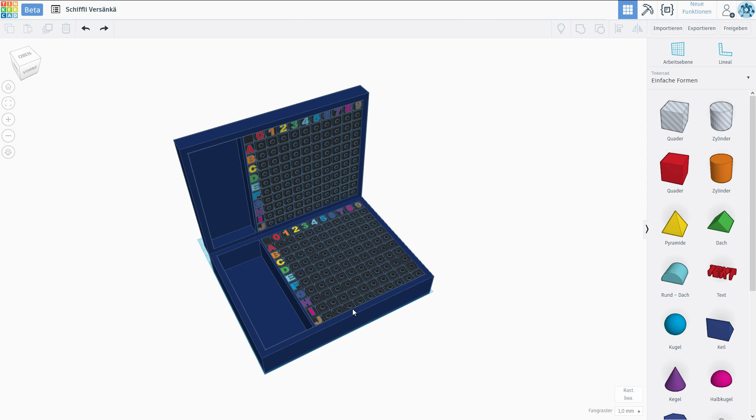I think it turned out pretty well, however there are quite a few things we still have to design. In this episode I want to focus a little bit on the functional parts, essentially creating the hinge system and possibly also a locking mechanism so you can store it away without it opening up on its own. Okay, with that out of the way, let's get right into it.

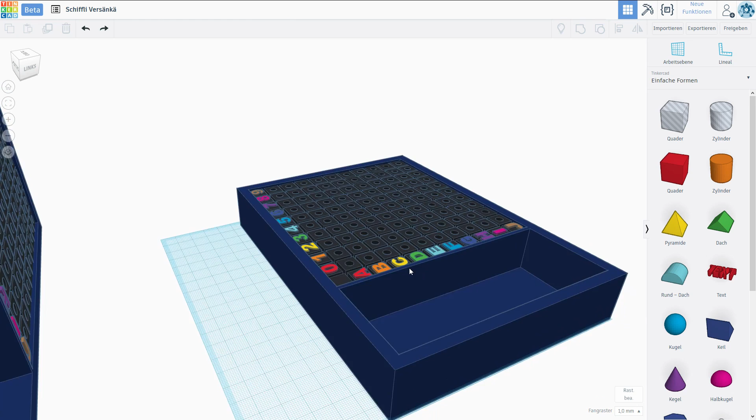First of all, I want to push this out of the way, I don't really need that right now. We are going to focus on this part right here, and I think I want to start with a normal cube. Yeah, let's use that and see what we can make of it.

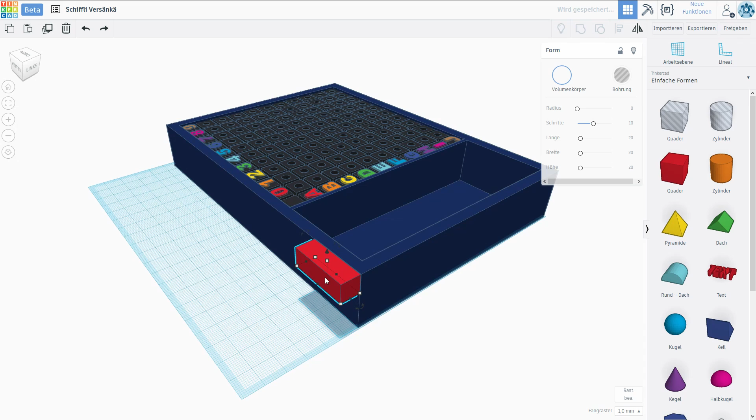I want to make this approximately 1 centimeter and then it can be approximately 30 in length. Let's bring this all the way up to the position I want it to be in, right there. And I think I want to go approximately 2 millimeters into this direction, so we have a little bit of an edge here.

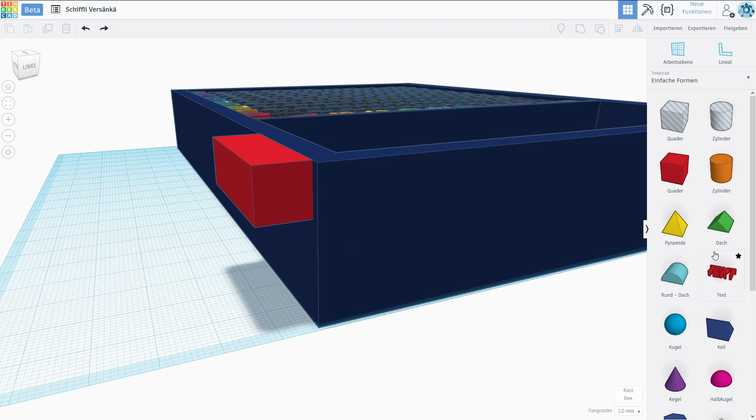Now, one thing we should always keep in mind is how we have to print it, and of course this one right here would require supports. However, I would like to print everything, or most of it at least, without supports. That means we have to keep gravity in mind, and for instance we can fix this by placing one of those guys inside of it.

So we're also going to make this 3 by 1 centimeters. There we go, and we're going to bring this over right there. Now, most printers can actually print at a 45-degree angle, so we don't necessarily need it to be this big.

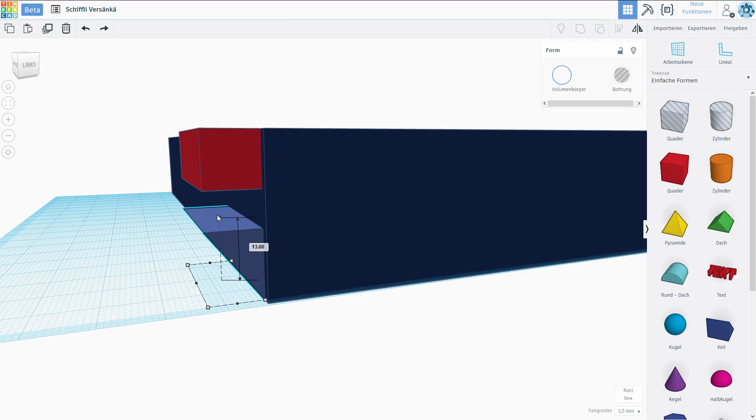Let's go ahead and do something like 15 millimeters. I'm gonna bring this back up. There we go, so that is gonna be my system, and this should be printable.

So why don't we go ahead and actually already combine these two guys? We need to do some further editing, but this way we can see a little bit better what I'm going for. The next thing I want to do is actually poke a hole into that.

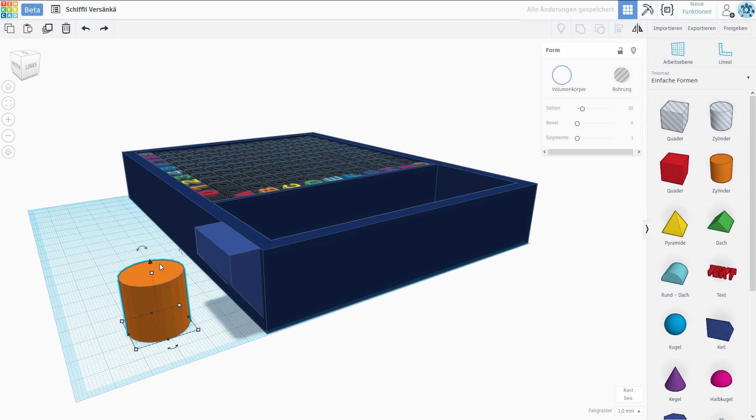So we're gonna create a cylinder and rotate this around. I'm gonna make this approximately 5 millimeters in diameter, make it a little bit longer, and bring it up to a position I'm comfortable with.

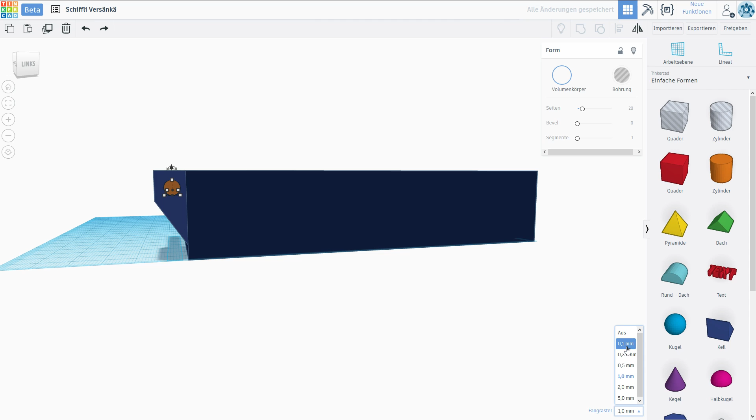This looks actually not too shabby. Maybe it's a little bit close to the right side. I need to go a little bit lower with my snapping here. Yeah, looking good, I think this is more or less centered. We're gonna go with that.

So this is going to be a hole, and therefore we want to combine these two objects and we should have our little hole for the hinge mechanism.

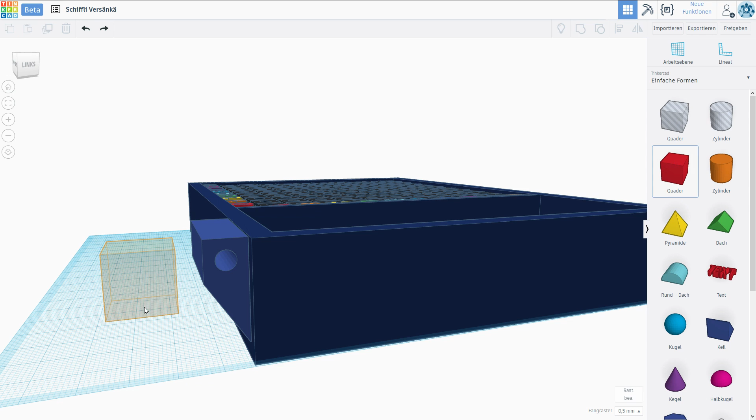Now, looking at this, we might want to do some cosmetic changes. Could we actually go with a normal cube? We're gonna rotate this 45 degrees, bring it up a little bit, and cut off a little bit of this edge. I would say we can cut off about this much and we should still be good with the stability of our item here.

Now, this is actually the first hinge I'm ever designing here. I'm just looking at a box that I have and trying to replicate it as best as possible.

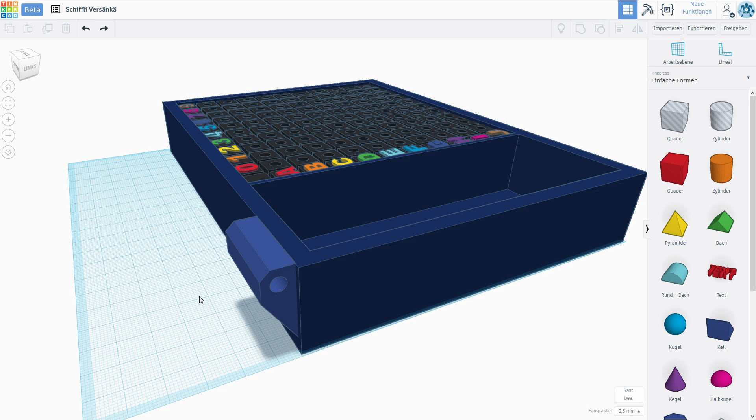And I see they have made some kind of locking mechanism on one side and not the other, so it's not symmetrical. So what I'm gonna do is copy it over at this stage, and using shift I can just drag it in one dimension. And we want to go ahead and do the same 2 millimeters right here, the distance.

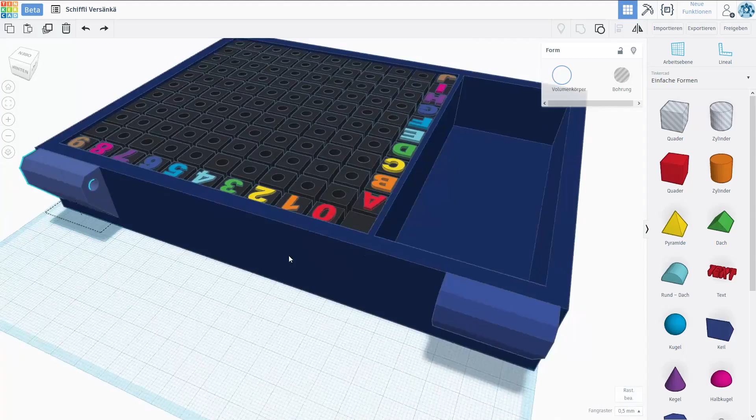And then we're gonna go back to this guy and switch up a few things right here. They actually have several shapes: one is just the stick for the entire row, and then they have a stopper shape on this side. This prevents the stick from wobbling and rotating around too much.

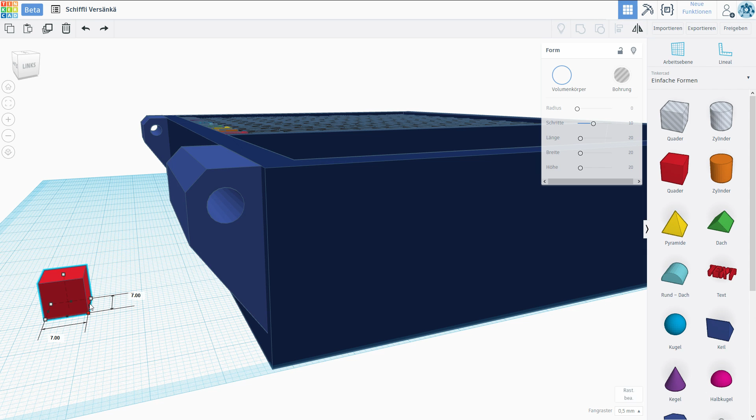So what I'm gonna do is take another cube, but make this substantially smaller. Let's go ahead and do approximately 7 or so in diameter, and I want to bring this right up here. Now I think what I'm actually gonna do is make this the same size.

We're gonna go with 7 by 7, that's the size of our hole. No, the hole is actually 5 by 5, isn't it? So that's probably what we should do, we should just poke out this section here. And how much of it should we do?

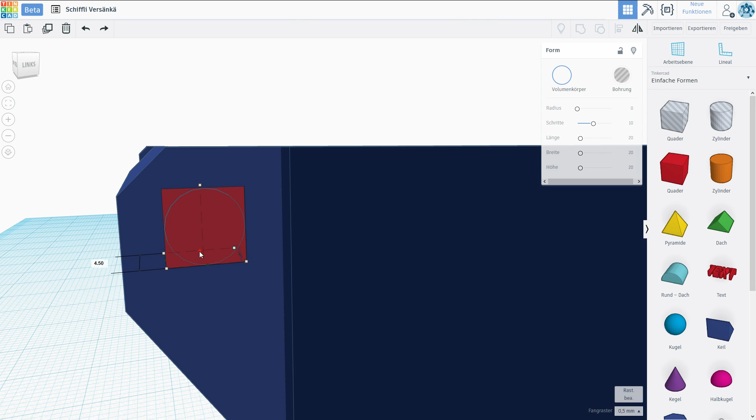Let's do approximately 3... no, we can actually do half a centimeter. No problem, we could do even more. Let's do more, we're gonna do exactly 1 centimeter.

There we go, we're gonna make this a hollow body. And then we need to combine it with this guy. Let's try to do that.

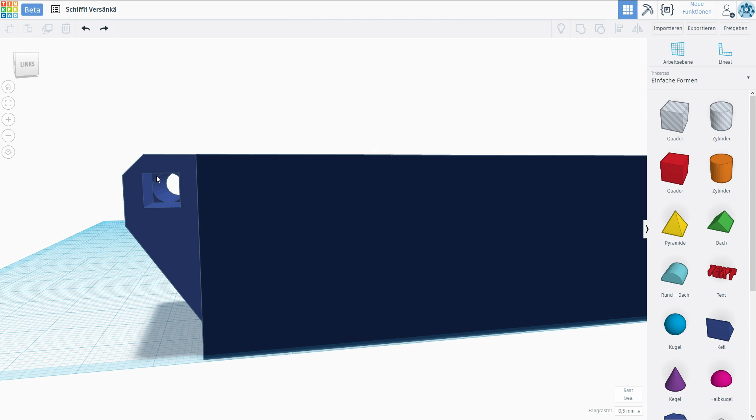Oh yeah, okay, and now we have this stopper block. So we do have the stick, but there is one of those cubes attached to the stick, so the stick itself cannot rotate or wobble around too much. To finish this off, we could even make a cap that we can attach and put right into there. But if I get the dimensions of the stick correct, then we should have no wobbliness at all.

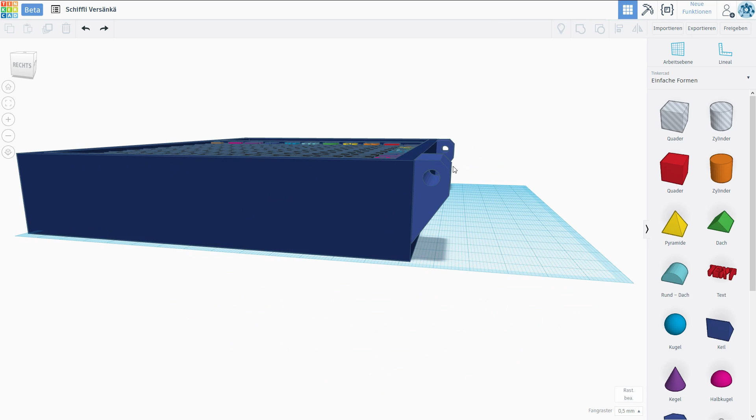So is this everything we needed to do for the bottom part? And this should also be printable, no problem whatsoever. Great, let's take care of the upper part.

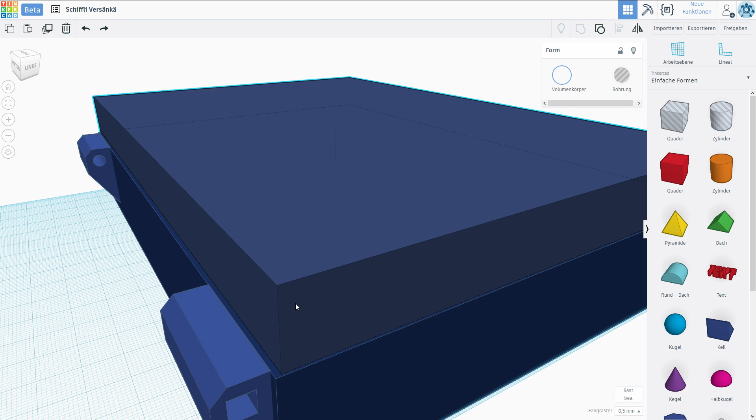Now I thought about this and I figured it's probably best to actually build this while it is closed. This way we are making sure we are building it so that we can still rotate it around without problems. And there we go. This seems to be the resting position, the perfect resting position. And now we can start designing the other hinges.

Let me think about that for a bit. I probably want a module that is very close to this guy, but not so close that we cannot actually put it in. So we need approximately 0.4 millimeters of space in between our two modules.

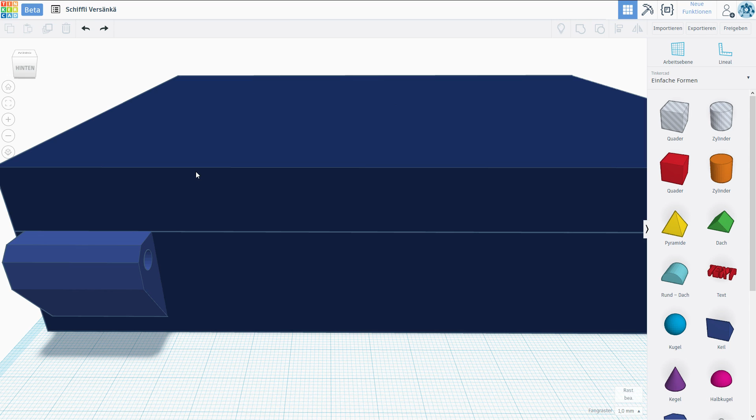The upper part right here is of course going to be printed the opposite way, so we need something that can be printed from the top down, looking at it this way.

So I think what I'm going to do is start with a cube right here with the right dimensions. We want this to be, let's go and do 10 millimeters again, and I want to bring this to the right location. Okay, there we go.

Now these are exactly next to each other and I want to make sure I can space them, so we're gonna go really exact with our measurements. And we want to go ahead and do 0.4 millimeters. You can see it at the bottom right there.

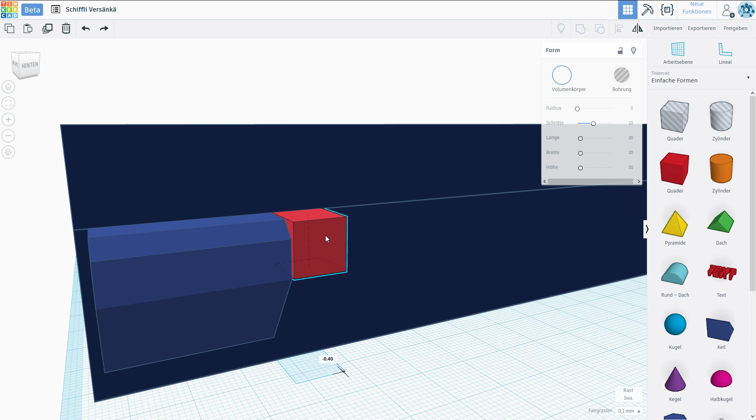So this should be enough space so that we can have a tight fit, but it's still capable of moving next to each other. Now, one thing I want to make sure of is that this is actually not a cube. We want to take a cylinder in order to do that, thinking about it.

Looking at it from this angle, we can actually see it is touching the board. That is not good, we have to make this smaller than 10. Let's go ahead and do approximately 9.

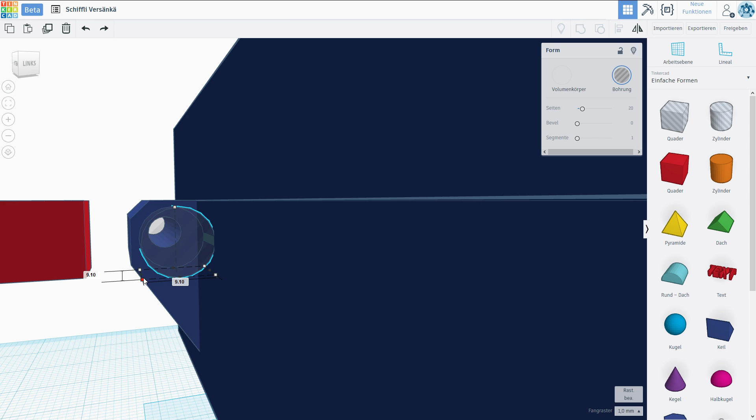Great, so now we are dead center and we also have a little bit of spacing here. That means we should be able to rotate this around without too many problems. Now, is the spacing enough, is the question.

This might be such a tight fit that we have problems moving the part, but I'm just going to assume we are going to be okay for now. Nice, okay, this is going to be the lower part.

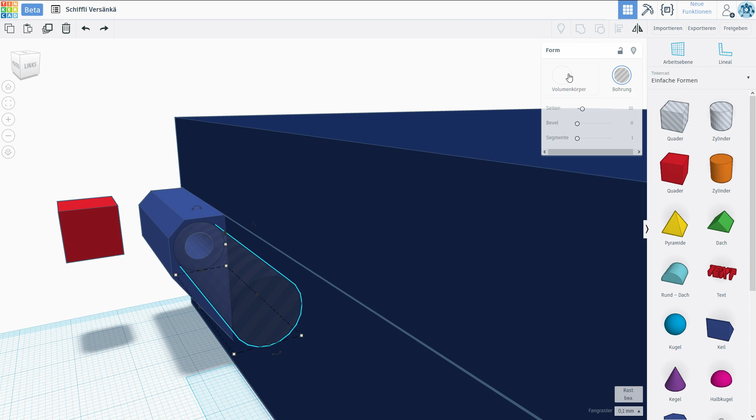Let's go back to a full body, and now we can take this cube again. We're also going to make it 9 in width, and we're going to bring it over and up a little bit, exactly to the center of the cylinder, and we're going to make it the same length. There we go, oh yeah, this should weld nicely together.

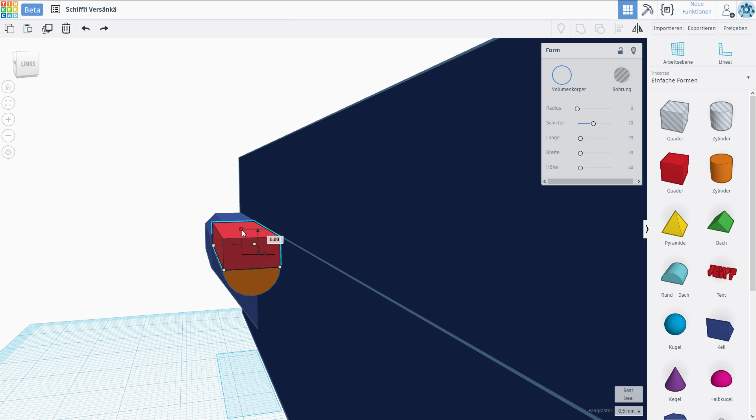I also want to make this a little bit smaller because as soon as the actual upper part starts, I want to start with another cube. Let's go a little bit higher, maybe 5 millimeters there.

Alright, now I'm gonna take yet another cube and bring this on top of the one we just made. There we go, but this time we want to make sure that we are actually touching the surface of the board, just like that.

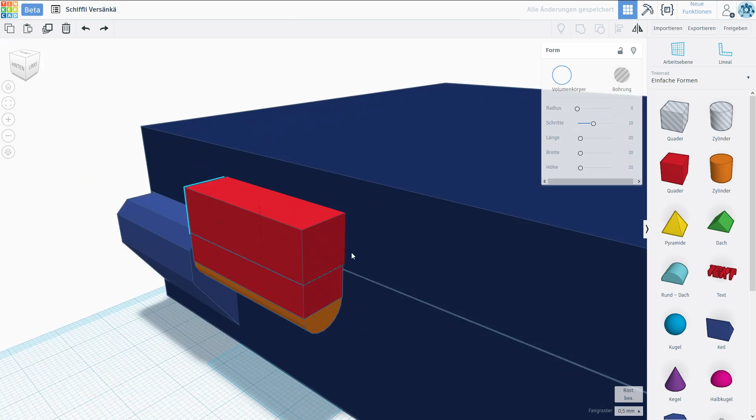Okay, and now if we think about this rotating, theoretically this should work. And also if we bring this up all the way to the top, we should be able to print it without issues. Okay, let's try to combine these three objects and see what happens.

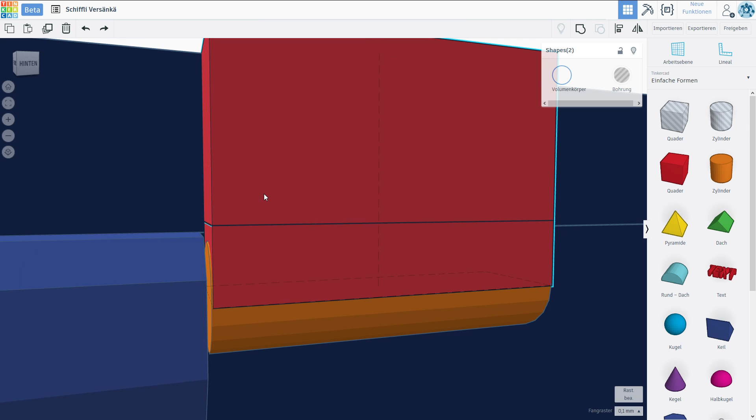Though there's a line that I don't want. Yeah, I made a mistake, I have to move these guys one more space over. Ah, beautiful. You can be really precise in this program, but I'm not yet convinced that it's going to be the most convenient program to design all of these things.

But anyway, let me cut off some of the upper part as well, which is going to do another one of those. And make sure this border isn't as rough. For instance, something like that.

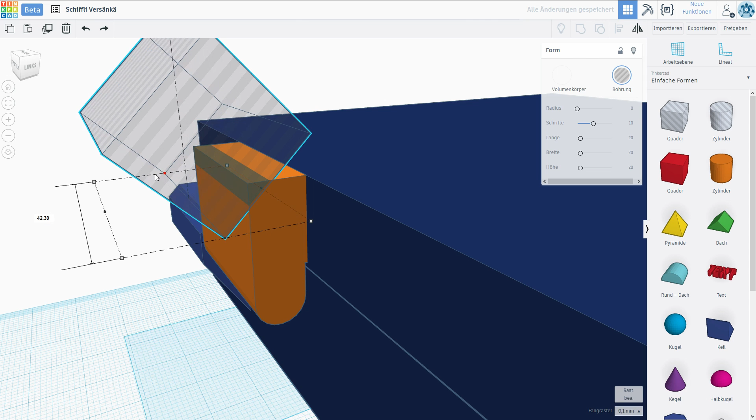That could already be good. Combine these two. There we go. Looking already better. Another thing we have to make sure of, of course, is that we still have the same thing going on here. We have to have a hole. However, I need to make sure it is exactly lined up with our first hole here.

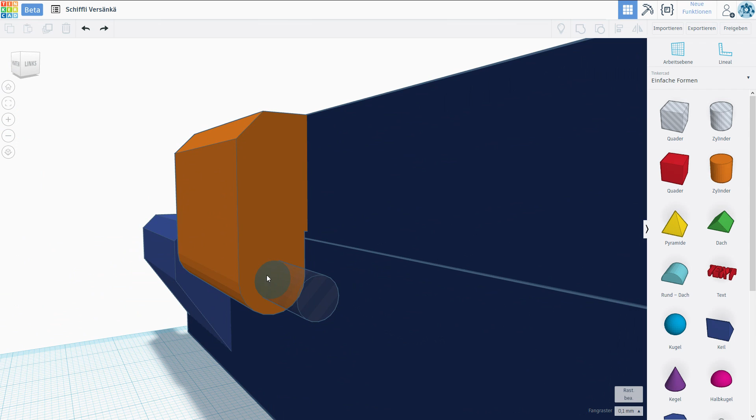There we go. That looks about right. I'm pretty sure it's exact. And therefore, we can select this and that and combine them again in order to get our hole. Beautiful. Look at that. It's going to be perfect. Oh yeah, it's definitely going to work out. And if you think about it opening, then it theoretically should also work.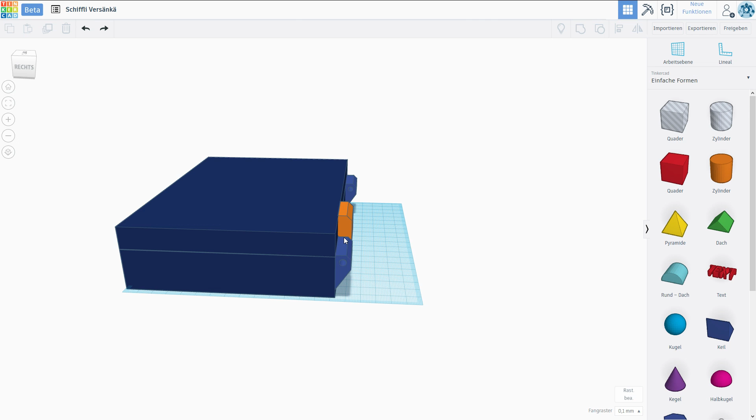Unfortunately, there's no easy way for me to test it in this program since I cannot decide where the pivot point should be. So I was thinking about maybe using another program for the next project, so we might be able to do a little bit more detailed work with more tools at our disposal.

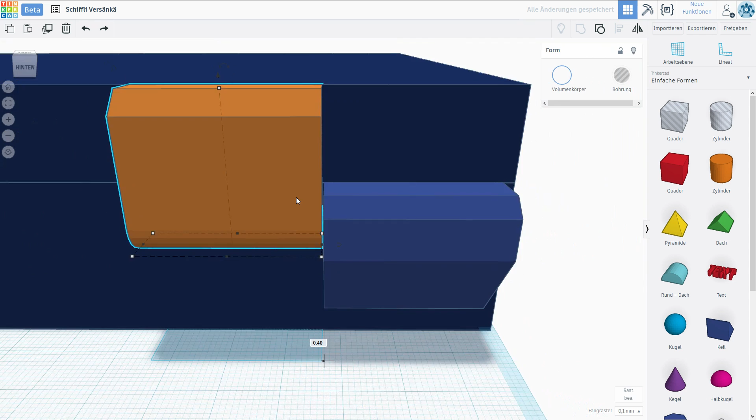But yeah, for now I'm just gonna copy this over, Control D, and I'm gonna shift this over here. As of this point we move 0.4 millimeters over and we have the exact same distance on both of these. Both of these should be printable. All we need to do is maybe set up one more of those guys here at the back.

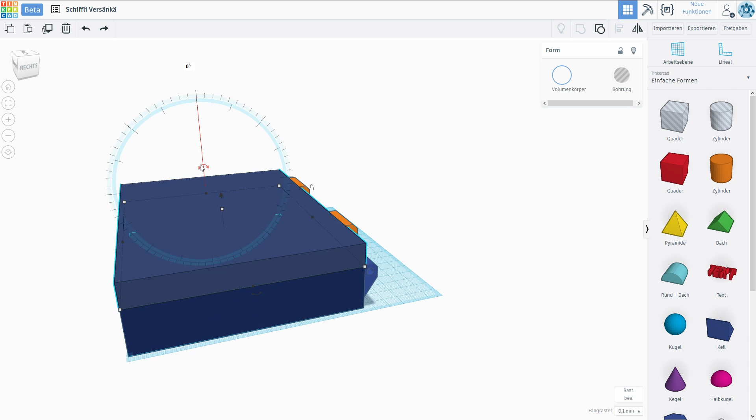Now, one more thing I want to make sure of is that it actually stops at a certain point. So that's going to be a little bit hard to imagine. Maybe we rotate this around very briefly. Oh no, I actually meant to first attach those guys probably. Yeah, let's make them bluish as well. And we're gonna select that and group everything together. Oh yeah, look at that. This might actually work out.

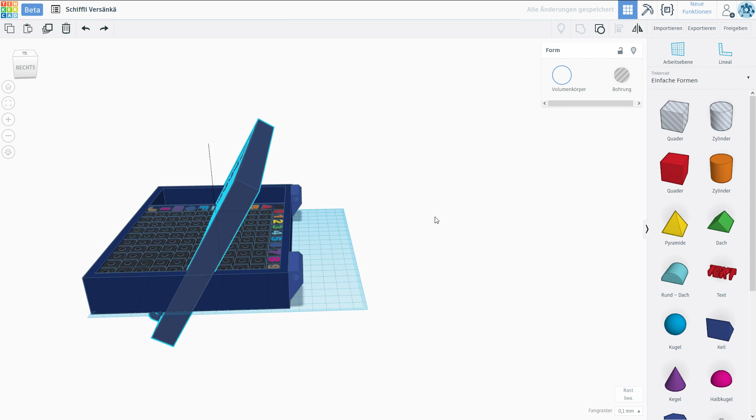We're gonna rotate it up to, let's say, 120 degrees. This looks comfortable. And I want to bring it up to the location where it usually would be, and you can see that the rotation is not going to be an issue at all. However, I want to stop it at a certain point, so I was thinking about adding something here that is going to be stopping it against the floor, for instance, or even better, against the board itself.

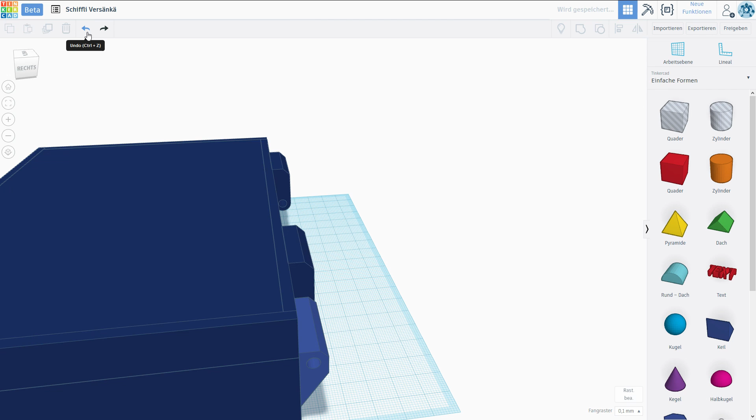Yeah, let's do that. I'm gonna undo everything until we have control over stuff, and I'm gonna copy one more of those hinges over. Now, let's see. I probably want to leave a little bit of space free here, but then we can make this relatively big. It feels like that is too much. I'm gonna limit this a little bit. There we go, that looks about right.

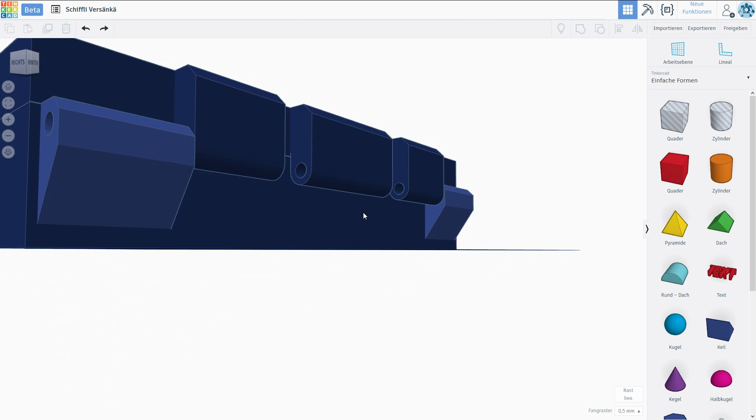However, the bottom we probably now want to design differently. We have to think about that. There's gonna be an extension here of some sort, maybe one of those. If we added one right there, for instance, you can imagine by turning it around, it would eventually stop at the bottom part of the game. And where that spot is, we have to figure out now.

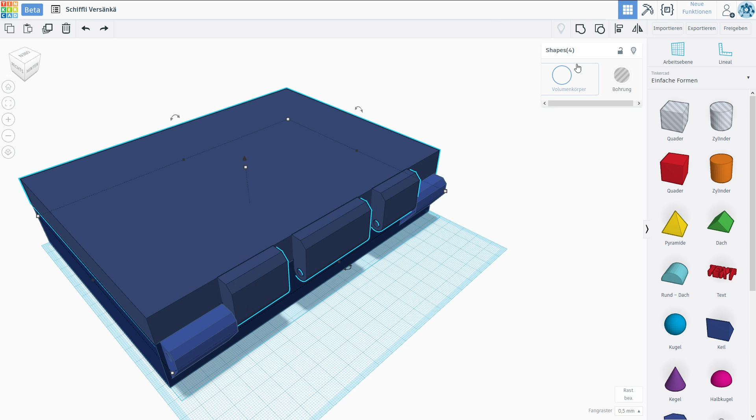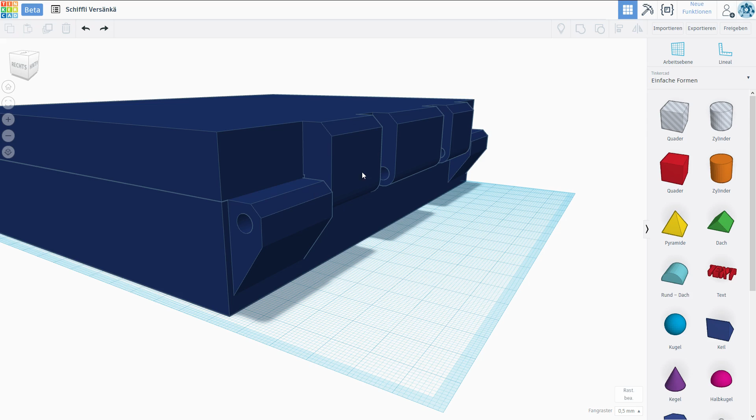So I'm gonna go ahead and combine all of these objects once again so that we can do some rotation and testing. Actually, before that, let's also combine the lower part of the box. And we're gonna design the stick, since we have everything in perfect place at the moment. The stick needs to be a little bit smaller, so these parts can all move around the stick. However, at this point we want to make it a very tight fit, so that it really holds in place.

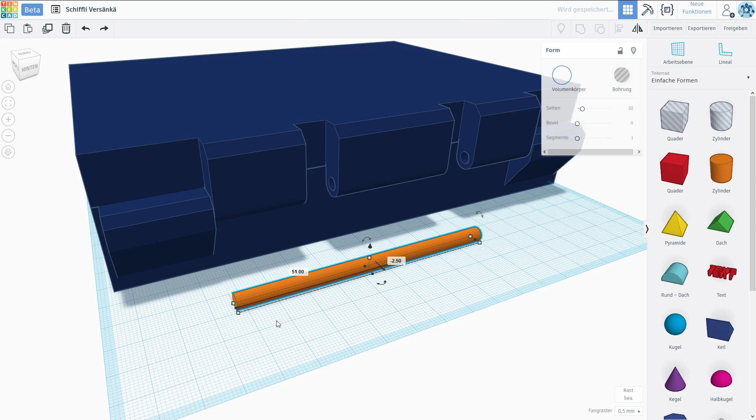So we're gonna start with a cylinder and rotate it the right way. We want to use the dimensions we used for our hole, which are 5mm. Now we need to be a little bit more precise. I'm gonna set my snapping to 0.1mm. I want to have a distance of 0.4mm around the entire thing. So since we start at 5mm, we want double 0.4, which is 0.8. So we go down to 4.2. Same thing right here, 4.2. And that should be the size of our stick, theoretically.

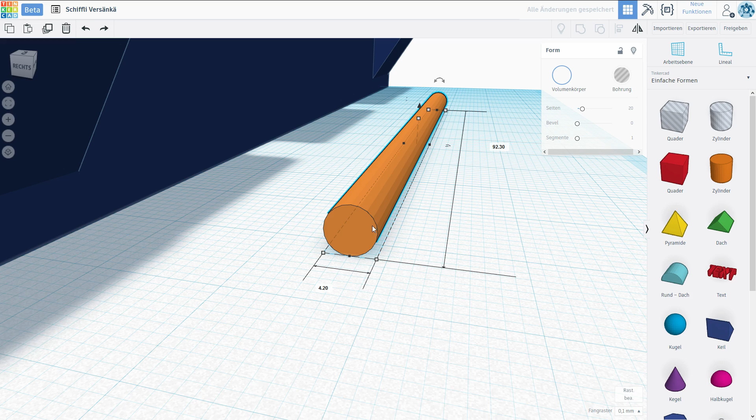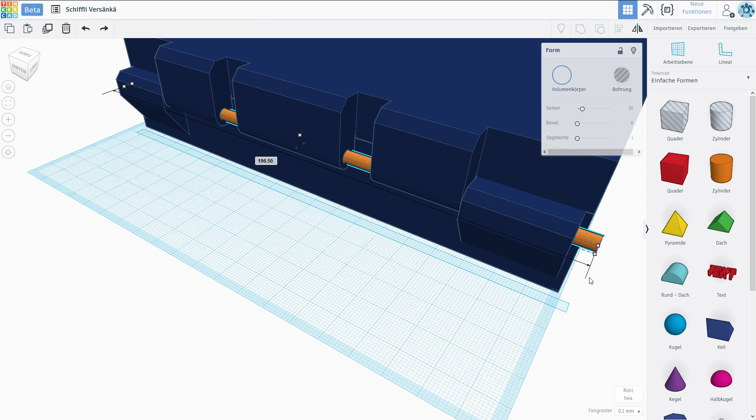Let's bring it up to the place where we need it. I want to make sure that we line it up just right, and that could be a little bit of an issue. Okay, I think I got it lined up. It seems to be more or less perfect. It's going through everything, so we can drag it all the way through here as well. Now, right here, I want to make sure it's going in approximately 2mm or so. I don't want this to get in the way. So that's 1, 2, and this way it's not gonna stick out by 2mm.

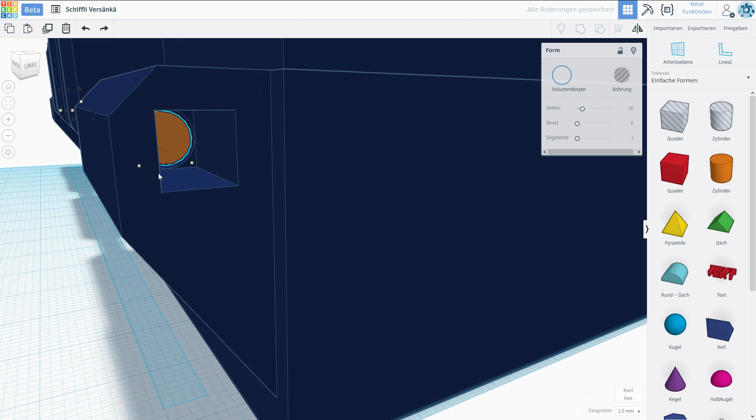Same thing right here. Here we gotta be a little bit more careful, because after 1 centimeter or so, we want to switch into the other shape. Now, is this precise enough? Yeah, it looks as though we got it spot on. Good, let's switch the shape into a cube. The cube is gonna be what? What was that, 9mm, or did we make it 7? Oh no, it seems to be actually 5. Alright. Now the cube needs to be 1 centimeter.

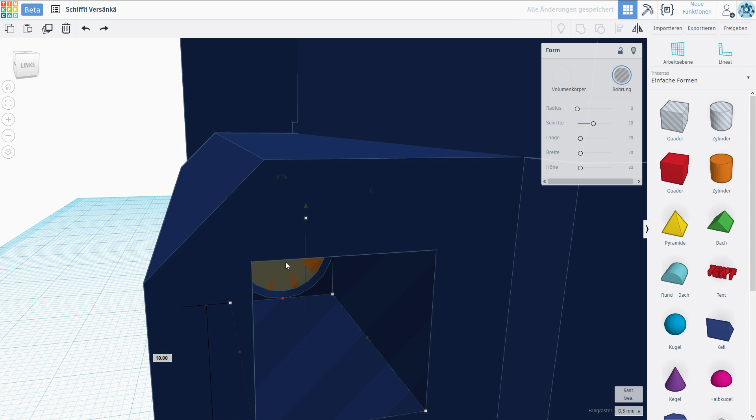There we go, so we touch the surface of the stick. But we want to make it 2mm smaller so that it also doesn't stick out, and we, as I said, have the potential to put a cap on this. Good. Now for a tight fit, you want to leave approximately 0.25mm of free space around the edges. And this is going to allow you to stick the part in. However, it's not going to have any space to wobble around. It's going to be such a tight fit that you will barely be able to get it out again.

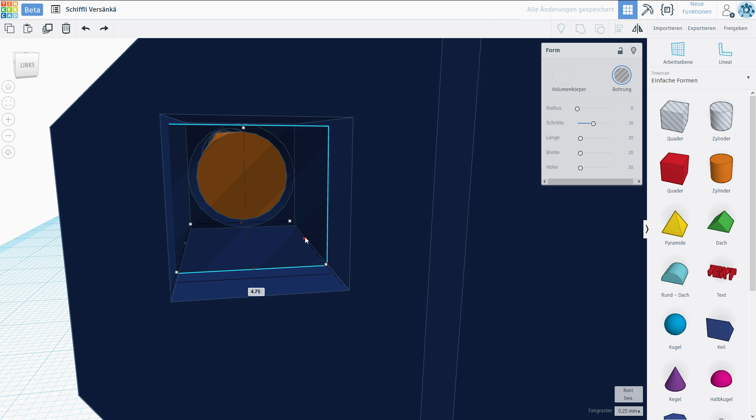So 0.25mm, we're gonna shrink this from the top down first of all to 4.75, so we can bring it up a little bit again. There we go. Also gonna shrink it right here and shrink it right there. Beautiful. So this should be an ultra tight fit for the square. I'm gonna swap this into a normal body again, and then I want to combine it with my stick. Let's do that. Oh yeah, beautiful.

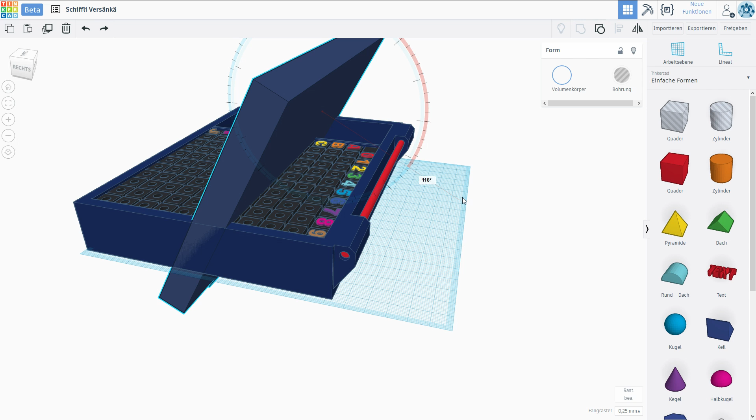Okay, this is gonna remain its own group because we are gonna print this thing in 3 parts possibly. But now we should be able to rotate this around. Let's do about 120 or so. As I said, this seems to be convenient to play. And we wanna make sure that we fit it where it would actually go again. Oh man. Yeah, I think I got it more or less right. So now we can think about the stopper mechanism. If we manage to place something in here, then we should be good, right?

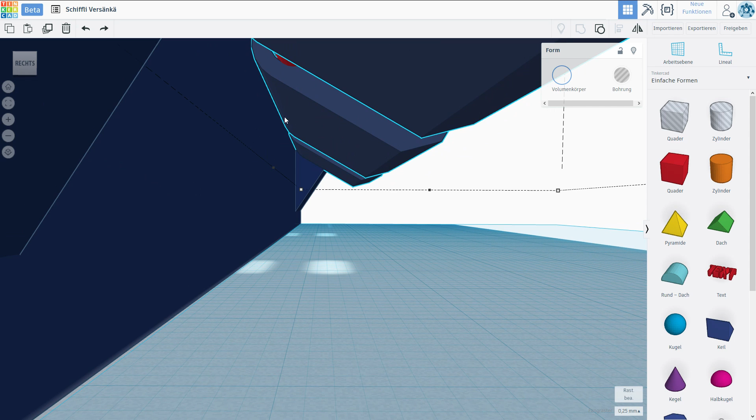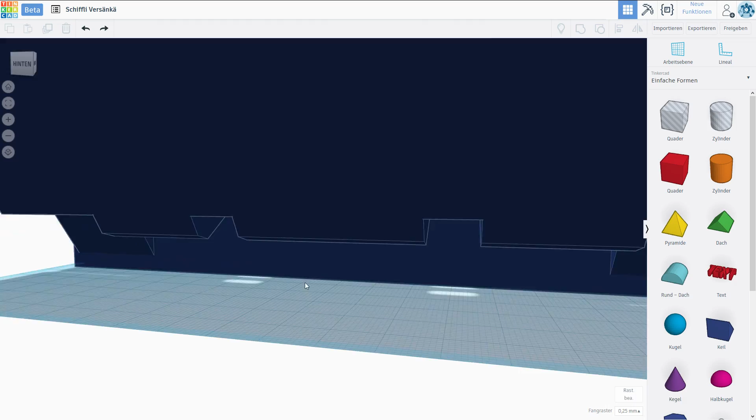So we need this to rotate around 122 degrees as well. Let me see if I can get this precise. Okay, I'm not so sure what I'm doing, but I think we can get it right. So this seems to be exactly at the box. Of course, I want to make this a little bit smoother, but this would be the basic idea, that it stops at exactly this angle. Let me think about this. Is this really a good angle? Maybe it's not steep enough, to be honest with you.

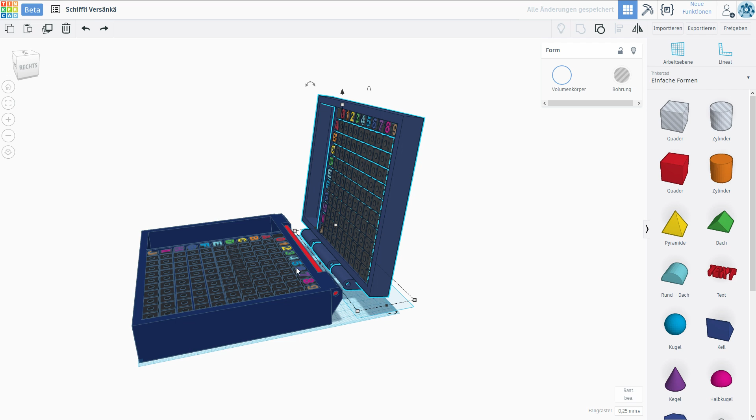Maybe we would prefer something like that, but let's not do 0.5. Let's do a round number. Like we did minus 10 degrees, so in total that would be 100 degrees then, instead of 90. There we go, 100 degrees just looks more reasonable in my opinion, so we're gonna do that. But that means we have to switch this guy up. Let me fix this quickly, and I'm gonna be right back. Okay, there we go. How about that? I think that would make it printable, and it would also stop right here. It would be a more or less elegant solution.

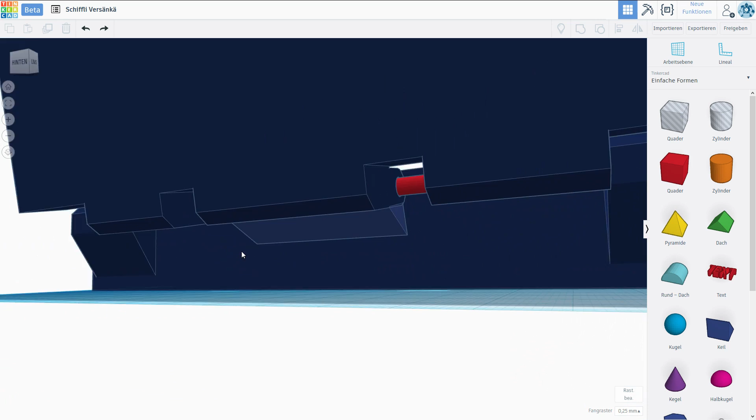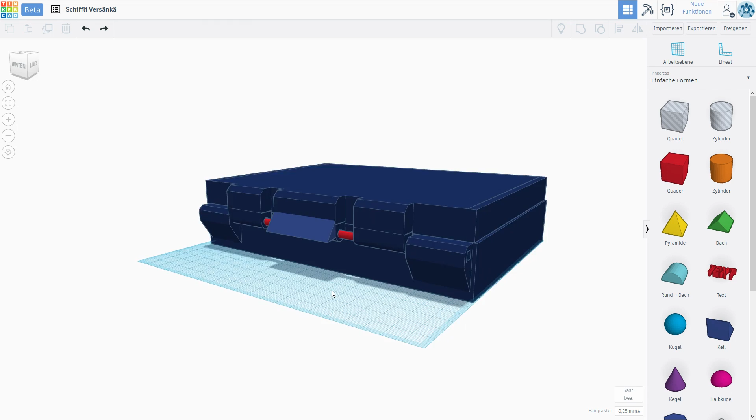More or less. How would it look when it's closed? That is the question. It would potentially look ugly. Let me test this out. We're gonna combine the upper part and we're gonna rotate it back. But for now we're gonna switch back 100 degrees and then put it on the top and see how that looks with the stopper block. There we go. What do you think? Is this too much or is this alright?

And I just see I switched this guy up again. There is a mistake here. I will have to fix that too. But it wouldn't hurt too much to have this stopper block at the box. We could even have the stopper block here, to be honest with you. Yeah, I'm gonna do that. Oh man, give me another second. I'm gonna fix it up and then I'm gonna be back.

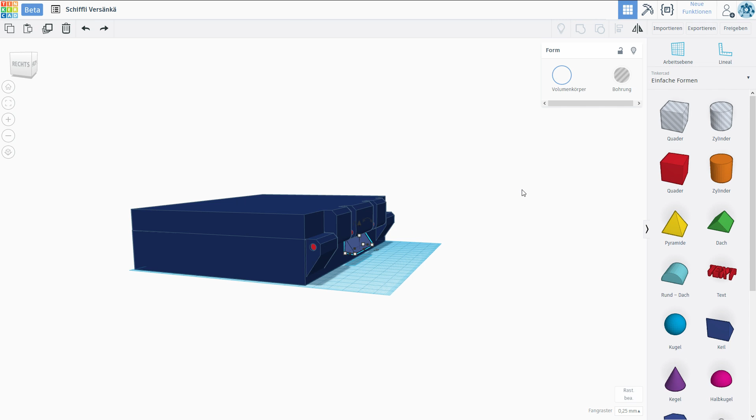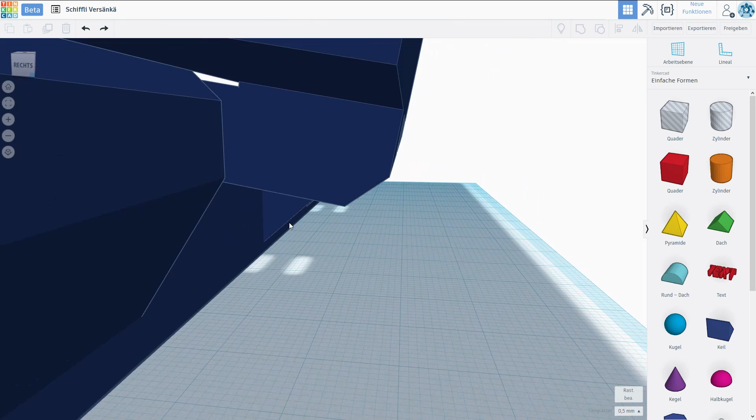And back we are. This time I designed the stopper block to be at the bottom part. And you can see I kind of tried to do the exact angle I want this to be resting on it. And I also left a little bit of space free for the hinge to be able to still rotate. Now we will have to test if it really works. But for now I want to select this bad boy and actually hook it up with our bottom part.

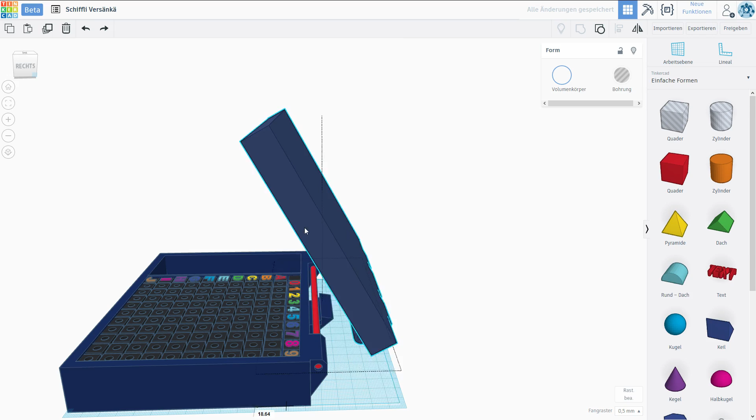There we go, looking not too shabby, and I do want to test out if it works at certain angles. So let's go ahead and rotate this maybe by 60 degrees or so, and we're gonna bring it back into place. So there we go, this is now at 60 degrees and we can see that we still have enough space for the hinge mechanism to work out.

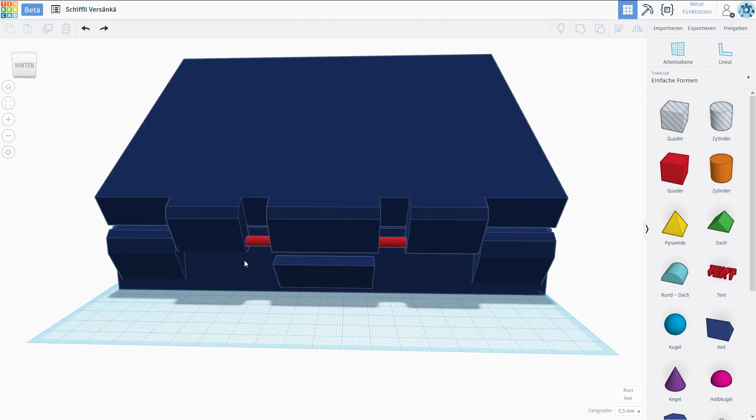Let's go ahead and do about 30 degrees. But there we go, this is more or less lined up and we can see at all times this is actually working out. I think we have a beautiful concept going on for ourselves here. So let's close the box by going another 30 degrees, and we want to wrap up this video by making a very simple closing mechanism.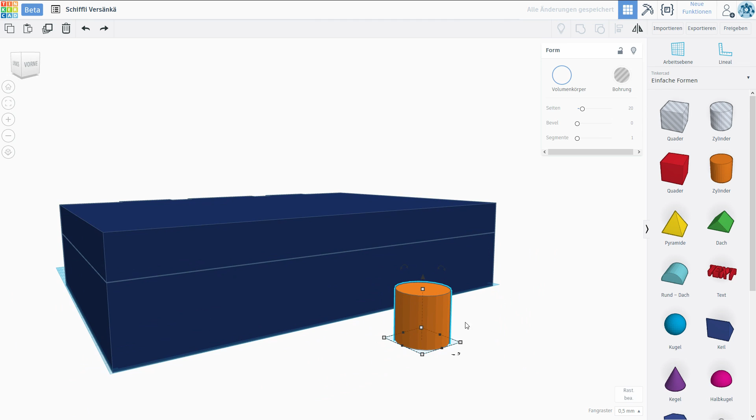This is how the box looks closed. It's not the most beautiful thing, but it's gonna be very practical. You know, the thing is gonna hold in place no problem. Now we need to add a closing mechanism. We're gonna do this very simply using a couple of cylinders and a handcrafted piece to close things off.

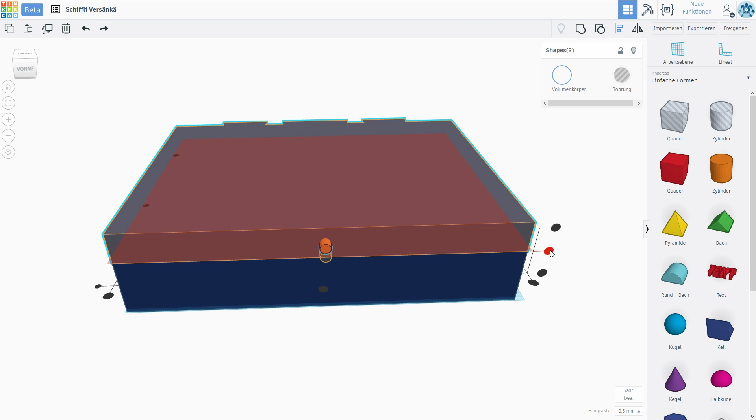Now, how can I ensure this is the perfect center? That's another thing I wonder about this program. Let me try something. We're gonna click this and the box, and then we're gonna click this align tool, and I want to... oh man, do I want to do that? There we go. Okay, so we can align it right there. Now it should be in the perfect center. Beautiful. So I'm thankful this is actually possible.

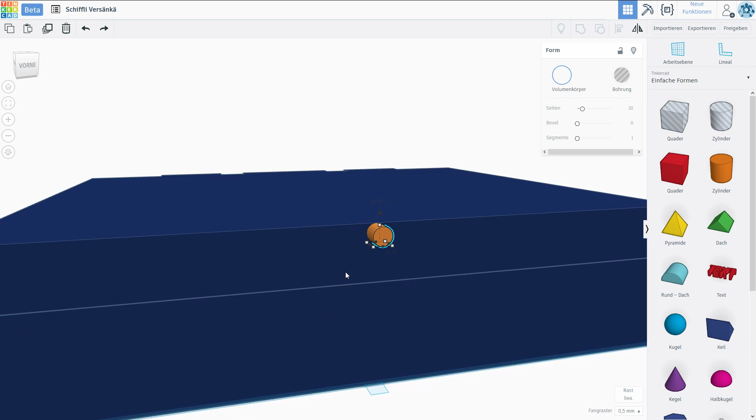You know, one problem we're gonna have is that this is gonna require a couple of supports. And I really don't want the supports. We could build it all the way on the top here. This way we could build it without using supports, because the printer does have a layer to start off with, but it might run into a couple of issues building that anyways.

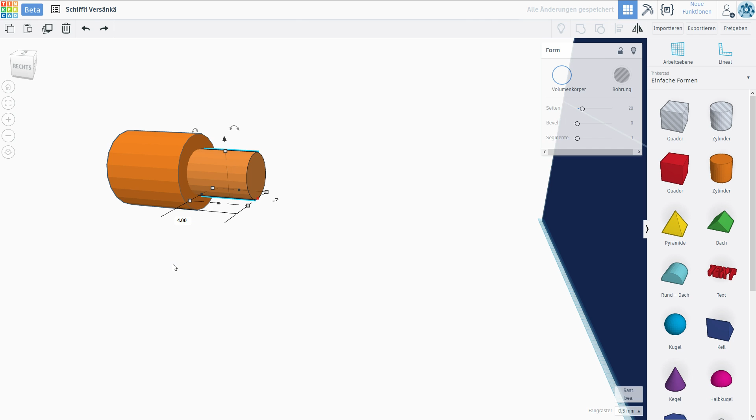Let me think. What we could do is make a pin out of those, so we could actually stick them in afterwards. These guys could be printed out separately, so let's grab one of those and we're gonna create yet another cylinder by... oh man, what did I do? I wanted to copy this so that we can bring it over, and then we're just gonna make it a little bit smaller, maybe 3 millimeters. We're gonna make it about 4 millimeters long. So this could be the pin that we actually stick into the box. So all we have to do is make a hole in the box and afterwards we can stick them in.

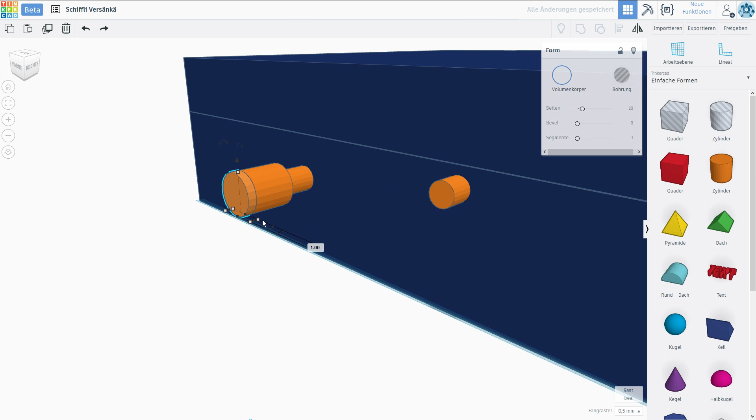What I want to do additionally is create an extra one of those, but this one we're gonna make substantially smaller, maybe just 1 millimeter. But we're gonna make it a little bit wider. This would allow us to, for instance, construct a piece that wraps around both of the pins. And it's not too obtrusive. We could even take a piece of rope and then bind them together. Let's go ahead, take all of these parts. We're gonna make one group out of those.

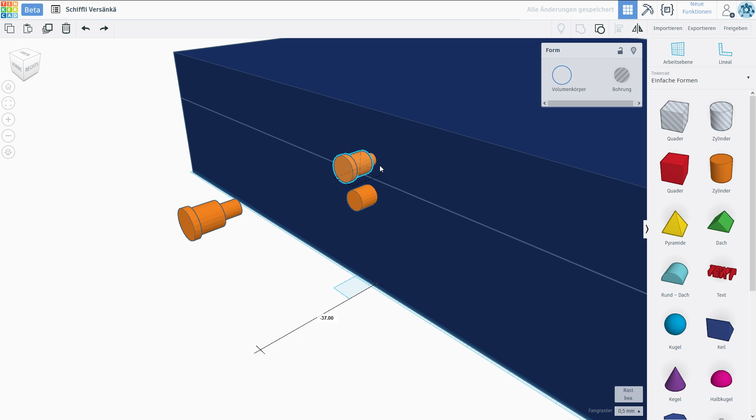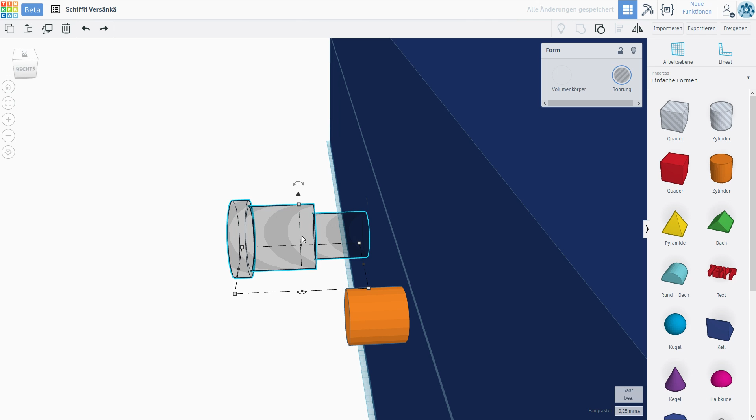I want to copy this so that we can actually put a hole into the thingy here. Oh, and that reminds me, of course, the hole needs to be a little bit bigger. It needs to be 0.25 millimeters bigger. This would make it 3.25. We need to go 3.5 and then move it around a bit. There we go. Okay, now this should be a little bit bigger. So we're gonna make a hole out of this and we're gonna put that right in there.

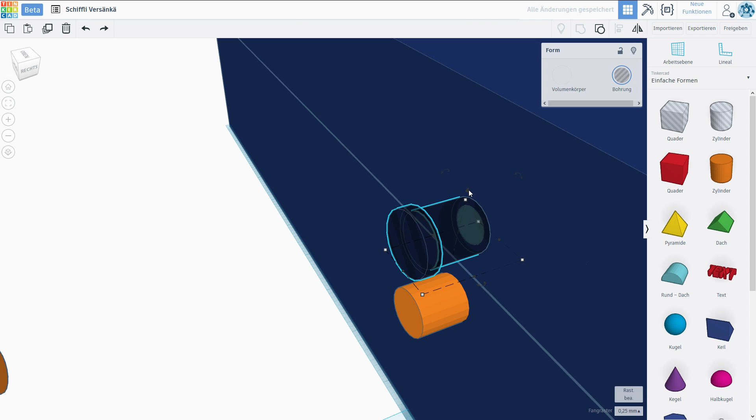Beautiful. Okay, let's try to combine these two objects and see what happens. Whoa, doesn't look promising so far, but it never does. There we go. It actually worked out. So what I should do is actually make a copy of this before we waste it, because we need to apply it to the bottom as well, of course. So let me quickly finish poking the holes. And there we go, we got our box designed.

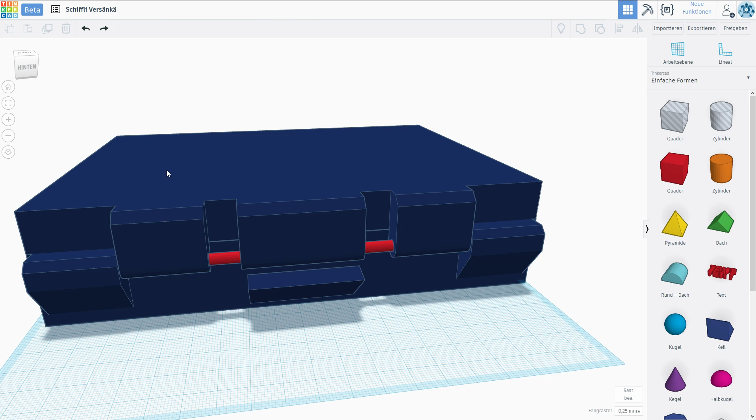All we need is maybe a little piece. I'm not even sure if I want to make this out of plastic. Maybe I'm just gonna use a nice piece of rope or something like that. But theoretically, this should all work out. We have the upper part, the lower part, we have this stick piece, and then these two little pins to print out.

In the next episode, we still have, of course, the pieces, the pins, and everything else, the decorative stuff to design. Maybe we want to make the box a little bit nicer, and then in the last episode, I'm gonna print it out. I'm gonna tell you everything about the printer that I currently have. Do not worry about that, but all in its due time. For right now, we are just designing.